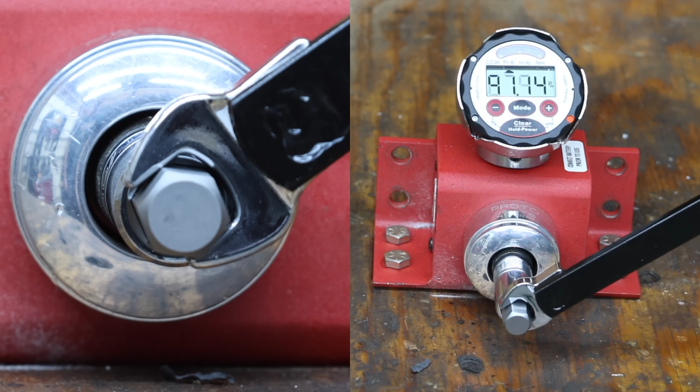So let's get the testing underway and see which brand is the best. First, we'll test the quality of the crowfoot wrenches, then we'll test the failure load of the wrenches. Most of the wrenches will not survive the final test.

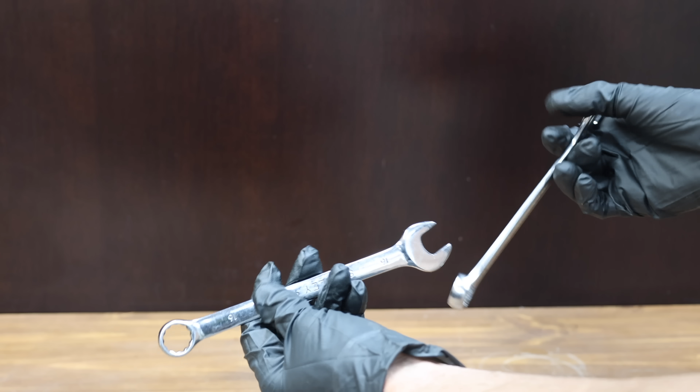A serpentine belt, also known as a drive belt, accessory belt, or fan belt, is typically held tight by an automatic tensioner. In order to remove the belt, it usually takes a decent amount of torque. Trying to double up a set of wrenches has been my go-to for years, but it's pretty easy to injure hands or fingers when the wrench slides out of position.

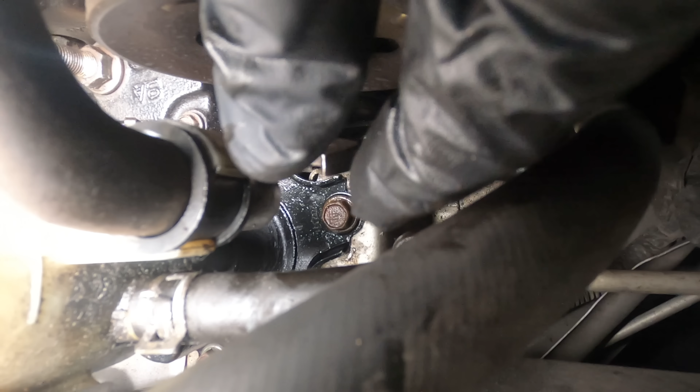Fortunately, there's a tool designed for this job that should also perform well at removing fasteners in hard-to-reach areas. At a price of only $20 is this Pittsburgh brand, sold at Harbor Freight. They claim this tool pays for itself 10 times over the first time you use it to replace your serpentine belt. It's supposed to fit idler pulleys requiring 15mm or 18mm hex or 3/8 or half-inch square drives. Includes 13, 14, and 15mm crowfoot wrench. And the Pittsburgh is made in China.

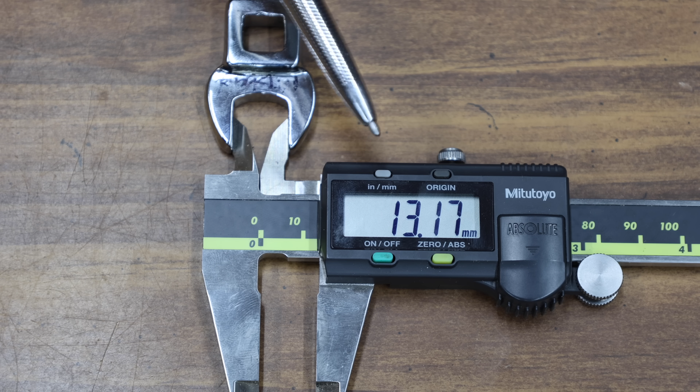Most of the crowfeet wrenches look identical, so let's weigh them to see if there's any difference in weight. The 13mm Pittsburgh weighs 31.28 grams. I measured the inner diameter of 3 crowfoot wrenches, the thickness or width, and the outer diameter. Let's use this torque wrench calibration tool to measure the maximum torque before the crowfoot rounds the soft coupling nut.

The Pittsburgh wrench rounded the nut at 27.74 foot-pounds. The wrench started off at 13.17mm, and the very soft coupling nut did stretch the jaw and cause some damage at 13.24mm. That's 0.07mm of stretch.

At a price of $28 is this AllToolsTools brand. Let's just call it the AllTools brand. It's an 8-piece universal 3/8 inch and half-inch drive set. Provides the required leverage and clearance to release the spring pressure and move the tensioner pulley. Includes 15, 16, 18mm hex or 3/8 or half-inch square drive.

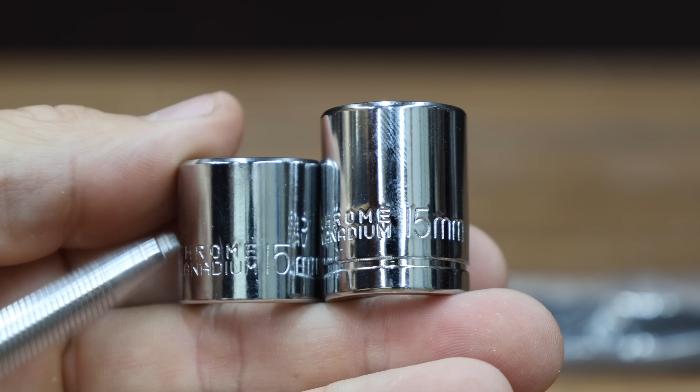The AllTools is on the left and the Pittsburgh is on the right, and the AllTools has a much lower profile for working in those tight spaces. And the AllTools is made in China.

The Pittsburgh is on the left and the AllTools is on the right, and they definitely look a little bit different. The AllTools weighs a little bit more than the Pittsburgh at 32.42 grams. The AllTools jaw opening is a little bit larger at 13.19mm, but the wrench is a little bit thicker and has a smaller outer diameter.

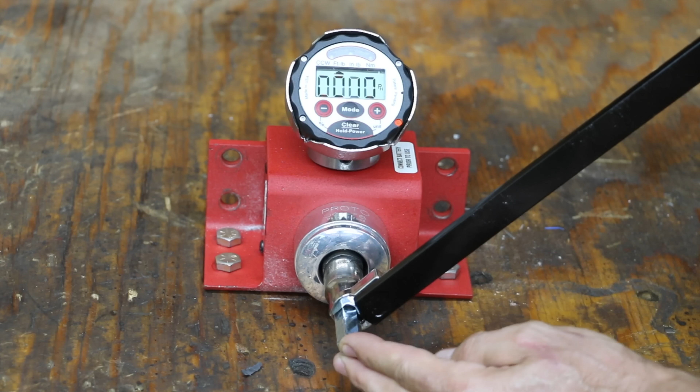The AllTools rounded the nut at 25.63 foot-pounds, or 2 foot-pounds less than the Pittsburgh. The AllTools experienced even more jaw stretch than the Pittsburgh at 0.09mm.

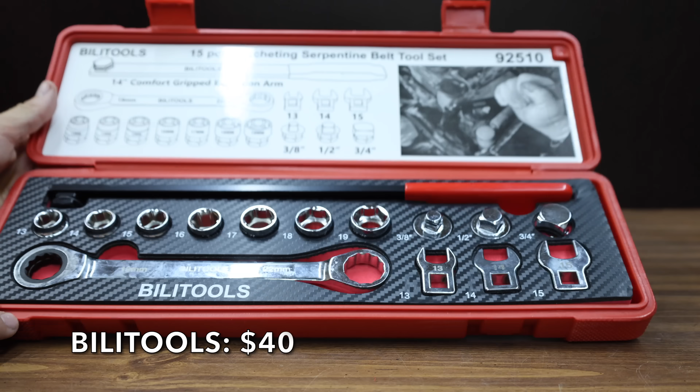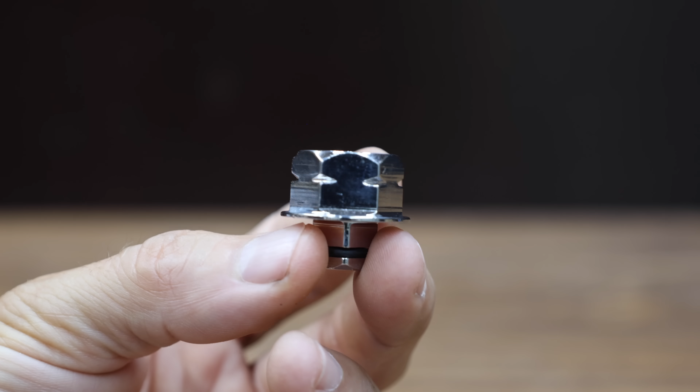At a price of $40 is this Bilitools set. Combines the advantages of a ratcheting wrench with the requirements of a serpentine belt removal tool. 7 low-profile sockets and extension to help fit into tight spots. Includes a 14-inch extension arm, ratcheting wrench with 19mm, 22mm female ratchet drive, and 3/8, half-inch, and 3/4 square adapters.

Sockets include 13 through 19mm. Crowfeet wrenches in 13, 14, and 15mm. The Bilitools is made in China, and it weighs 31.5 grams.

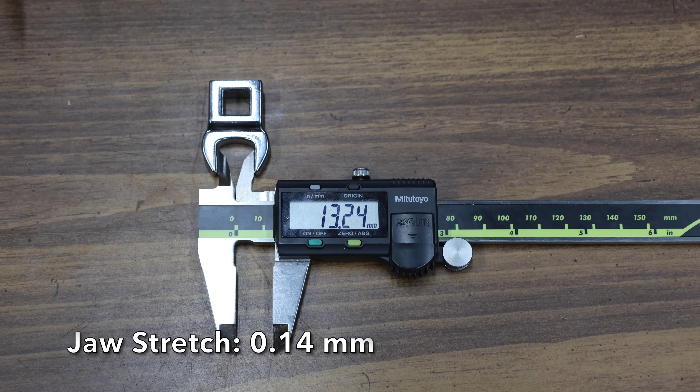The Bilitools is at 13.1mm for the tightest fit yet. The width is 6.6mm, and the outer diameter is the smallest yet at 25.15. The Bilitools just moved into third place at 26.04 foot-pounds. It experienced by far the most jaw stretch, going from 13.1 to 13.24mm.

At a price of $42 is this Powerbuilt brand. It's a 13-piece set, supposed to include everything that's needed for GM, Ford, Chrysler, Saab, VW, and Volvo. It even includes a pretty nice-looking blow-molded case. Includes 7 low-profile sockets, and the Powerbuilt is made in Taiwan.

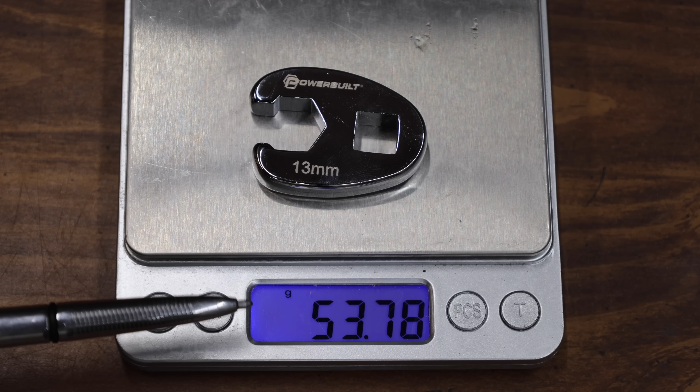The Powerbuilt is by far the heaviest yet at 53.78 grams. The name Powerbuilt seems to fit, as this crowfoot is very large and thick. It also has a huge advantage of having more points of contact like a flare nut wrench. It might not be good for tight spaces, but it's by far the best at very close to 73 foot-pounds. Very impressive. The Powerbuilt is still at 13.3mm, so no damage.

At a price of $44 is this Performance Tool brand.

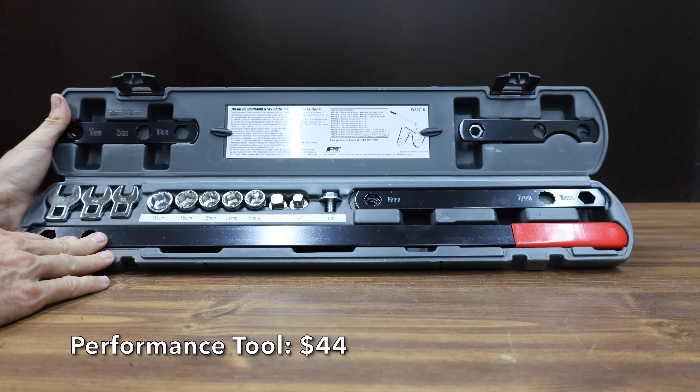And this is the most comprehensive set yet with 16 pieces. It even includes a kit designed to remove fan clutches, and has 2 different extensions for hard-to-reach areas.

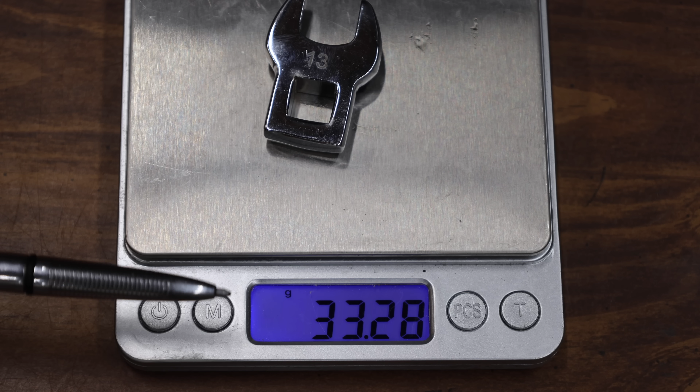The Performance Tool is made in China, weighing 33.28 grams. It's at 12.98mm, a pretty narrow wrench with an average outer diameter. It moves into second place behind the Powerbuilt at 35.49 foot-pounds, and 0.05mm of jaw stretch is also second place.

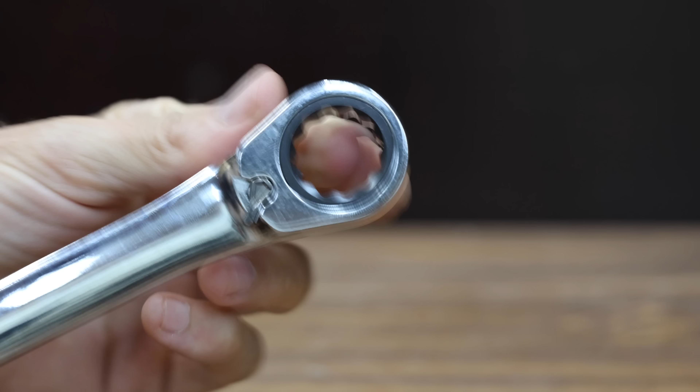At a price of $46 is this ABN brand, made in Taiwan. It's a 15-piece kit, including socket sizes 13 to 19mm, and also includes 3 crowfoot wrenches. It comes with a pretty nice looking blow molded case.

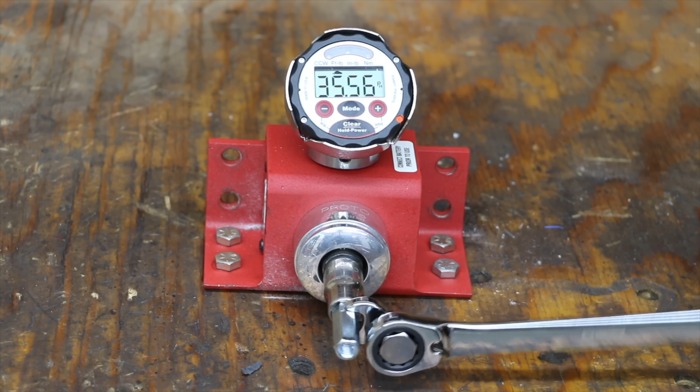The ABN is pretty heavy at 37.51 grams, starting off at 13.25mm. The wrench is a little wider than average and has a little larger outer diameter than average as well. The ABN barely edges out the Performance Tool at 35.56 foot-pounds to move into second place behind the Powerbuilt, and at 0.04mm, it did second best yet for avoiding jaw stretch.

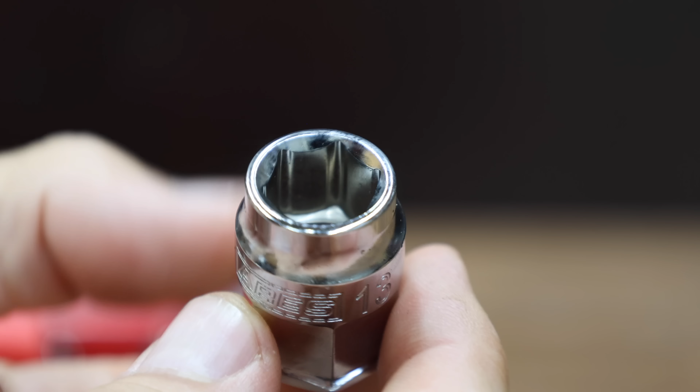At a price of $55 is this Ayers brand. It's a 15-piece set, with socket size coverage from 13 to 19mm, and crowfoot wrenches from 13 to 15 millimeters. It also includes 1/4 inch, 3/8, and 1/2 inch socket adapters, and even comes with a reversible ratcheting wrench. The Ayers brand is made in Taiwan.

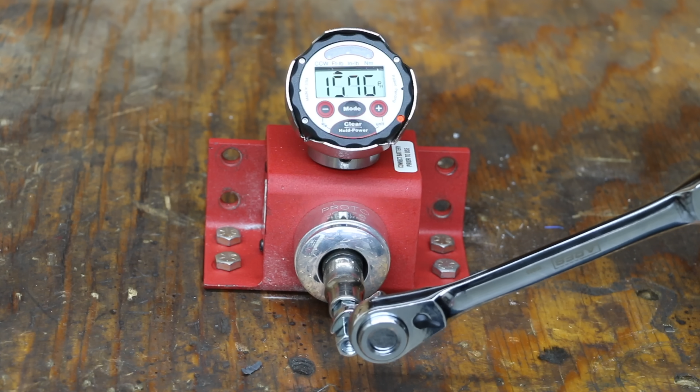The Ayers is pretty light at 30.44 grams, at 13.12 millimeters, but it's a pretty narrow wrench at only 5.9 millimeters, with 26.84 millimeters of outer diameter. The Ayers rounded the nut at 29.68 foot-pounds, and the jaw also experienced quite a bit of stretch.

Also at the price of $55 is this DNA brand. The tools come in a pretty nice looking blow molded case. It's a 16-piece set, coming with 5 sockets, 3 crow's feet, 3 bars, 2 square drives, 1 GM fan clutch kit, and 2 fixed screws.

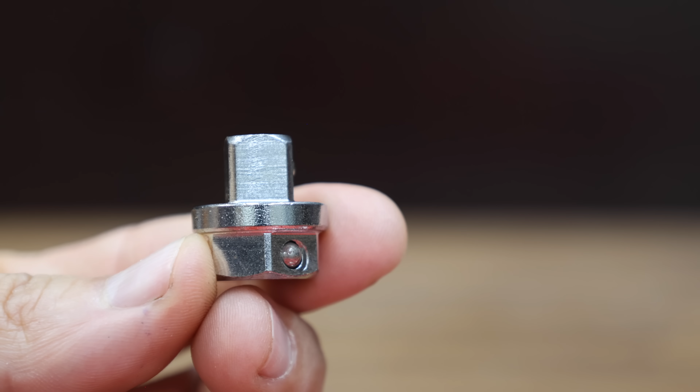The DNA motoring set is made in China, weighing 42.83 grams. It's at 12.92 millimeters and is pretty wide at 8.18 millimeters, with an outer diameter of 27.82 millimeters, so this Crowfoot wrench should perform very well. The DNA motoring moves into second place at 50.3 foot-pounds, though the jaw did experience quite a bit of damage at 0.08 millimeters of jaw stretch.

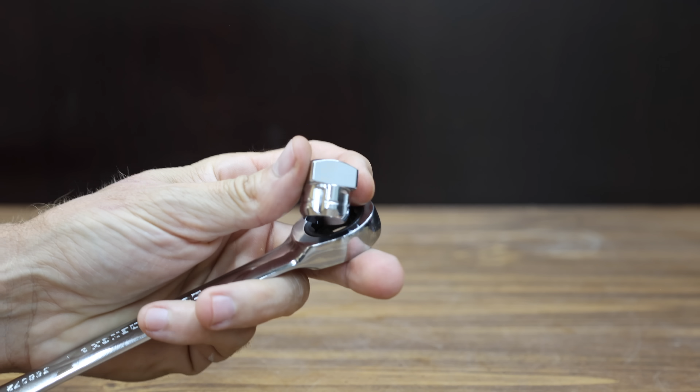It includes 3/8, 1/2 inch, and 3/4 inch adapters, with socket sizes from 13 to 19 millimeters and crow's feet from 13 to 15 millimeters. The GearWrench set is made in Taiwan, weighing 33.11 grams, at 13.15 millimeters, 6.08 millimeters of width, and 27.03 millimeters of outer diameter.

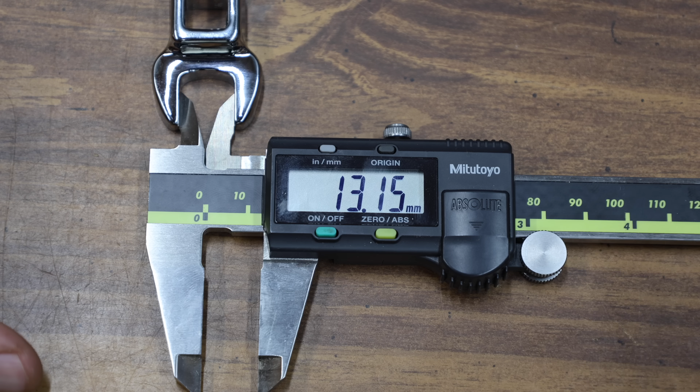The GearWrench moves into 5th place at 31.79 foot-pounds. However, it experienced minimal damage at 0.04 millimeters of jaw stretch.

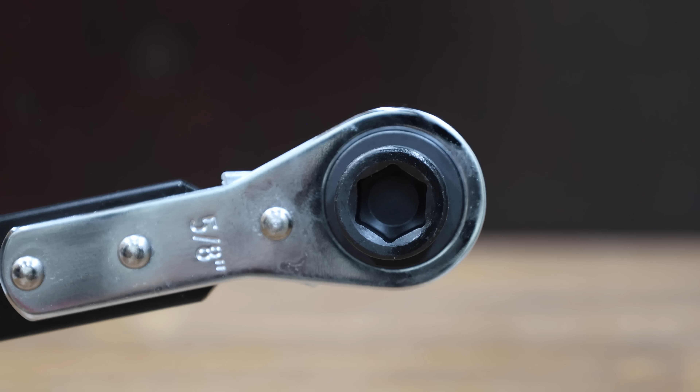At a price of $70 is this ICON set, which is sold at Harbor Freight. It has a 21-tooth reversible ratchet, includes 6 sockets and 3 Crowfoot wrenches, plus 3/8 and 1/2 inch adapters. The ICON definitely seems to have the best quality blow molded case. The 13-piece ICON set is made in Taiwan.

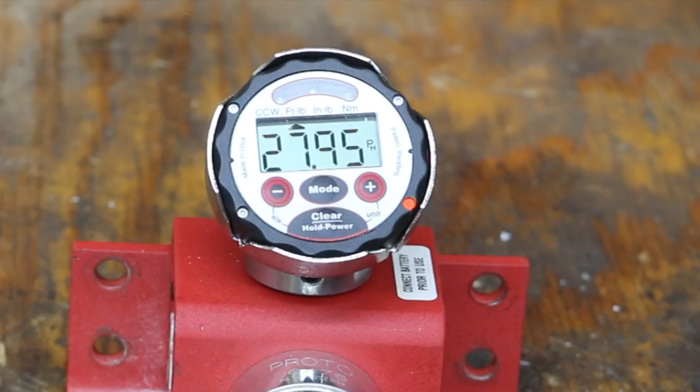It's right at 32 grams for the ICON. The Harbor Freight ICON is at 13.13 millimeters, but it's pretty narrow at only 5.93 millimeters, with an outer diameter that's pretty narrow at only 26.95. The Harbor Freight ICON just moved into 8th place behind the Pittsburgh at 27.95 foot-pounds, with the jaw only stretching by 0.04 millimeters.

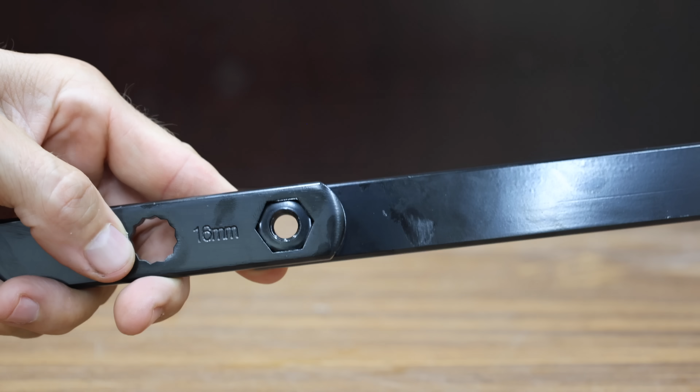Also at the price of $70, the same price as the ICON, is this OTC brand. It includes 13, 14, and 15 millimeter Crowfoot wrenches, plus a 13 and 16 millimeter 12-point wrench built into the handle, and comes with 3/8 and 1/2 inch square drives. The OTC is made in Taiwan.

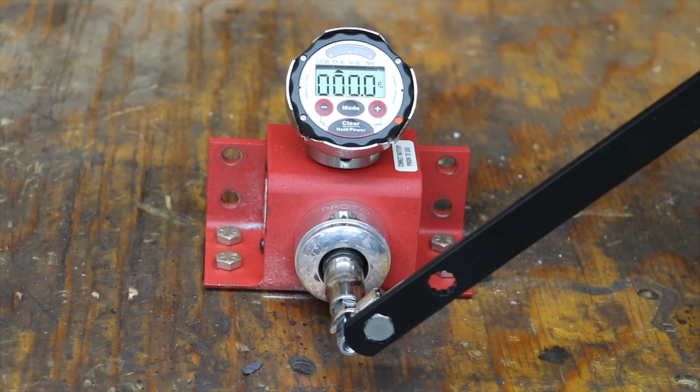The OTC weighs 31.8 grams, at 13.16 millimeters, and it's even more narrow than the ICON at 5.79, with an outer diameter of 26.99 millimeters. The OTC also struggled in this test at 27.16 foot-pounds, only experiencing 0.04 millimeters of jaw stretch.

I've had several requests to test the Matco Tools brand, and I did place an order.

There was no indication that the tool set was not in supply when I made the order, but when I placed the order, it was immediately placed on back order. Unfortunately, this has happened to me more than once, so I canceled the order after several weeks of waiting.

So the Powerbuilt came out on top at 73.01 foot-pounds. DNA Motoring finished in 2nd place at 50.3, and ABN 3rd at 35.56 foot-pounds.

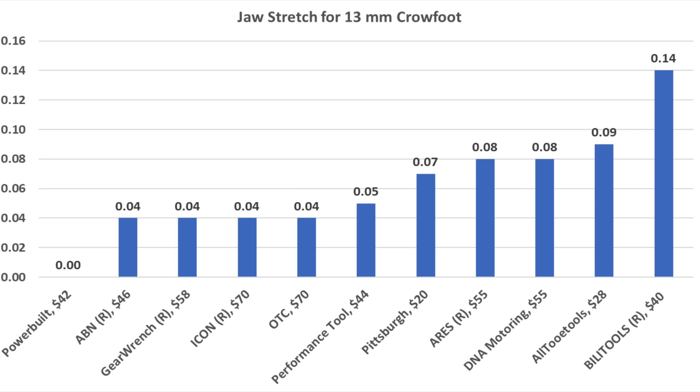The coupling nut is very soft and should not cause significant jaw stretch. Fortunately, the Powerbuilt did not experience any jaw stretch. ABN, GearWrench, ICON, and OTC finished in 2nd place at 0.04 millimeters of jaw stretch.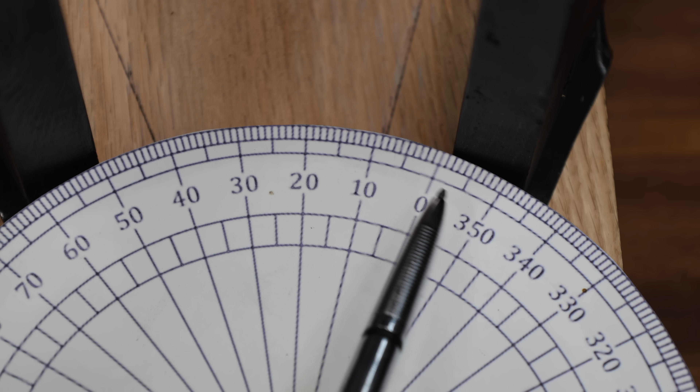If you're working within a tight space, you'll want a ratchet that makes a lot of progress with each back and forth swing. I'll be using a tester that has a 50-degree space, and we'll see how many right to left swings it takes for one complete rotation. Let's skip the Pittsburgh and the AllTooetools since they don't include a ratcheting wrench.

The tooth count on the Bilitools ratchet is 72, and the Bilitools is off to a pretty good start at 11.7 right to left passes. The ABN has around 128 tooth count ratcheting mechanism, and the ABN performed even better than the Bilitools at 11.2 right to left swings for one complete rotation.

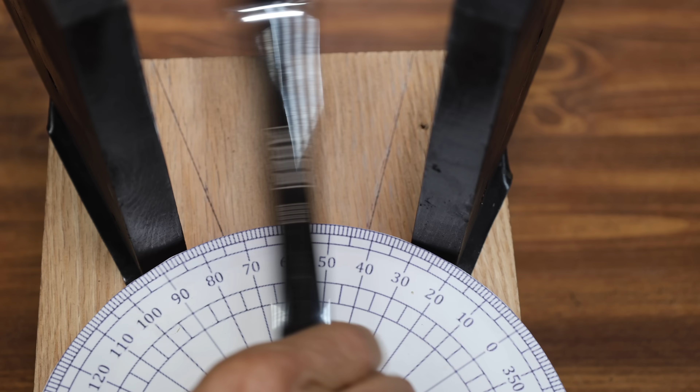The gear set on the 72 tooth ARES ratchet is definitely not as efficient as the ABN at 14.5 back and forth passes. The GearWrench ratcheting wrench also has 72 teeth, and it performed the same as the ARES at 14.5 back and forth passes.

The Harbor Freight ICON only has 21 teeth, and the low tooth count is really hurting the ICON with just one click during the backswing. With only one gear tooth advancing per swing, the ICON finally finished at 21.5.

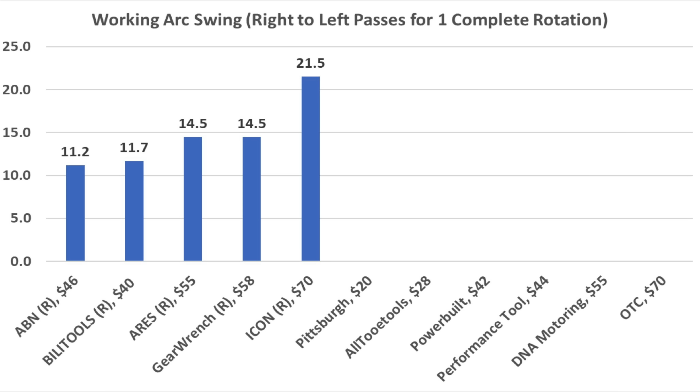So the ABN came out on top at 11.2 right to left passes. Bilitools finished in 2nd at 11.7, and ARES and GearWrench tied for 3rd at 14.5.

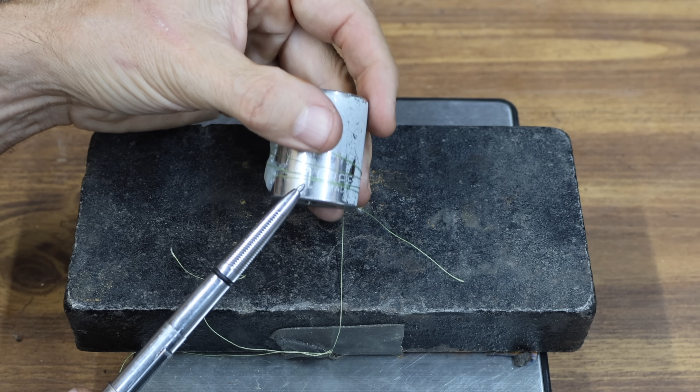Using a ratchet with a lot of backdrag in tight spaces can really make it challenging at times. If there's enough space, adding resistance to the socket using finger pressure allows the socket to advance, but sometimes that's not an option. I've got a fishing string attached to this 1-inch socket that's attached to a scale. I'll lift the ratcheting wrench until the gear set advances.

The Bilitools has quite a bit of backdrag at 616 grams. The ABN came out on top for working arc swing, and it's going to be very difficult to beat at only 204 grams of back drag.

Just like the Bilitools, the ARES has 72 teeth, and it also has quite a bit of back drag at 534 grams, moving into second place. The GearWrench just moved into second place behind the ABN at 396 grams of back drag.

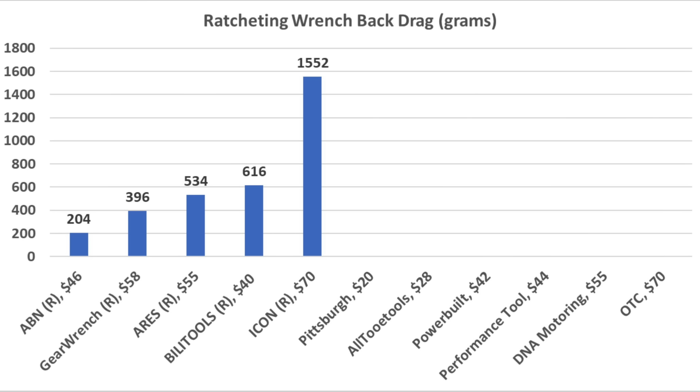The 21 tooth ICON seems pretty stiff, and 1,552 grams of back drag is more than twice as much as any of the other brands. So the ABN finished in first place at 204 grams of back drag. GearWrench finished in second place at 396 grams, and ARES at 534 grams of back drag.

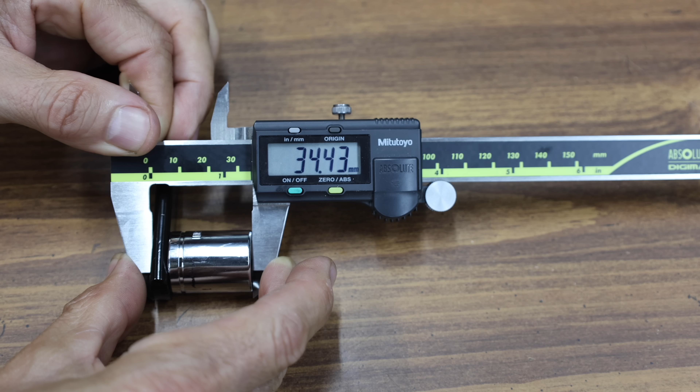If you're trying to access the tensioner pulley on a modern front-wheel drive import, wrench or socket clearance might be a challenge. The Pittsburgh does not come with low-profile sockets, and the wrench plus socket measure right at 34.43 millimeters. The AllTooetools offers a much lower profile at 27.48 millimeters, or about 7 millimeters difference.

The Bilitools with the ratcheting wrench moves into the lead at just under 26 millimeters. The Powerbuilt moves into second place behind the Bilitools at 26.9 millimeters. The Performance tool is going to be very difficult to beat at only 21.03 millimeters.

It's 30.28 millimeters for ABN's ratchet and socket. The ARES requires quite a bit of space at 32.28 millimeters. DNA Motoring moves into second place behind the Performance tool at 22.05.

The ratchet and socket for the GearWrench are at 26.09 millimeters. The ICON ratchet and socket have an even better profile at 25.36. At 20.42 millimeters, the OTC Tools moves into the lead.

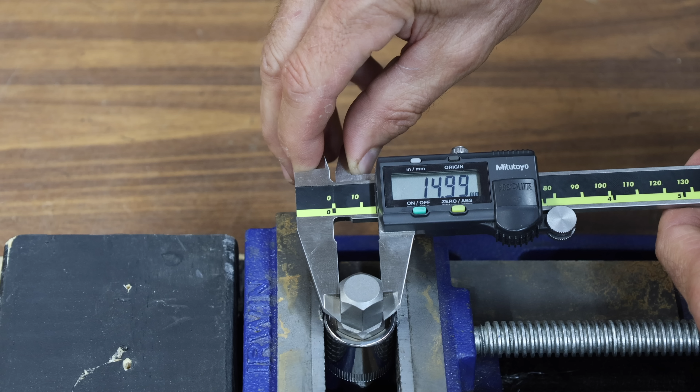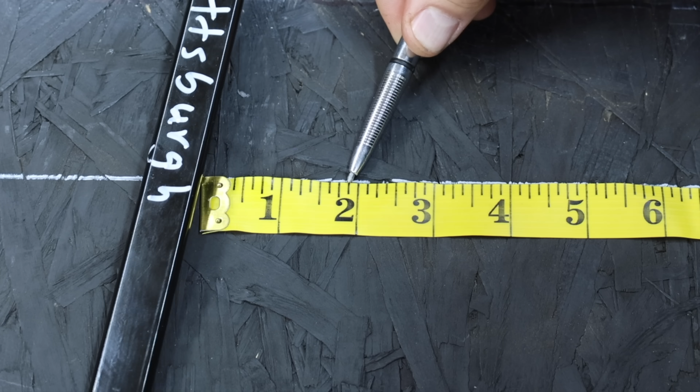Let's see which brand offers the tightest engagement with minimal slop using this 15 millimeter Allen socket. In tight spaces, minimal slop ensures the wrench has enough swing to release the tension from the belt tensioner. At 1 foot from the fulcrum, the Pittsburgh performed well at 1 7/8 inches of slop. I repeated this test for each of the wrenches, and the ABN ratcheting wrench did the best at 1 5/8.

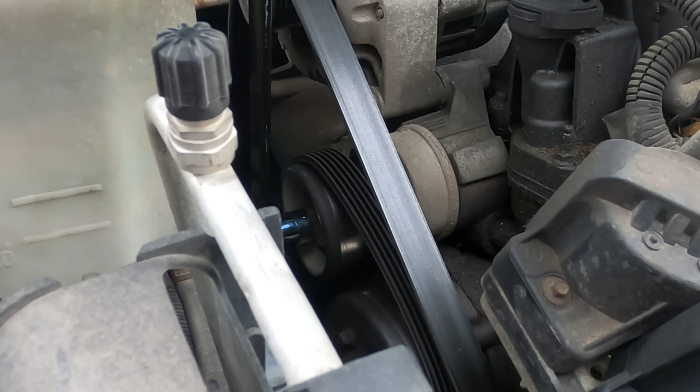The DNA Motoring non-ratcheting finished in second at 1 3/4. I tested out all the tools on a couple of Chevrolets and a Buick, and they all worked very well.

On the other hand, this is a fairly new Toyota 4Runner, and accessing the belt tensioner is a bit of a challenge. I rotated the socket several times to align it with the bolt. Even with the engine cover out of the way, the Pittsburgh just doesn't have enough range of motion to release the belt. The AllTools performs the same as the Pittsburgh; insufficient swing space prevents the wrench from releasing the pulley tension.

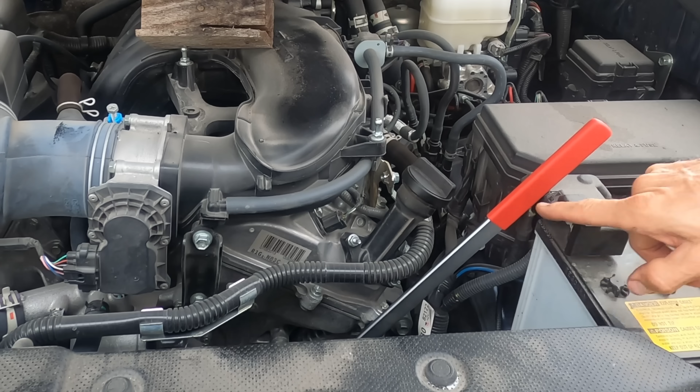The Bilitools ratcheting wrench has a 2-piece handle that adjusts to provide plenty of access swing to release the belt tension. Just like with the Pittsburgh and AllTools, there's not enough swing space for the Powerbuilt. The Performance Tools adjustable 2-piece handle can be adjusted to offer ample access and swing to release the belt tension.

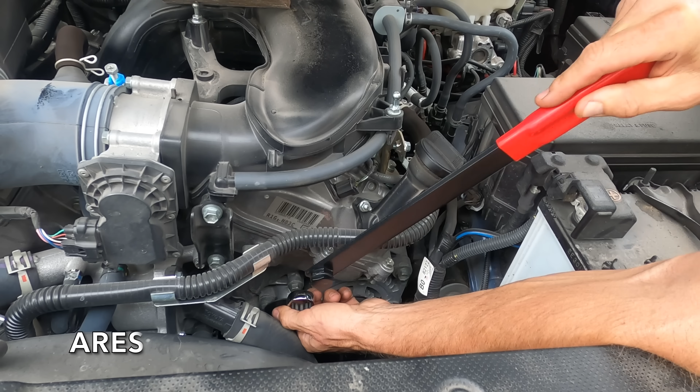Just like the Bilitools, the ABN ratcheting wrench has a 2-piece handle that adjusts to provide plenty of access swing to release the belt tension. The ARES also has a ratcheting wrench, but isn't as efficient as the ABN for maximizing wrench positioning and swing.

The 2-piece DNA Motoring isn't as efficient as a ratcheting wrench, but it'll get the job done if you can get it to hold on to the socket. The GearWrench's 2-piece ratchet isn't quite as precise as the ABN, but it'll definitely release the belt tension.

Without the second handle piece, the ICON doesn't have enough swing space. With the extra handle attachment, the ICON will work, but the 21-gear ratcheting mechanism makes this more of a challenge than the Bilitools, ABN, ARES, and GearWrench. The OTC's 2-piece handle can be adjusted to provide plenty of swing space to release the belt tension.

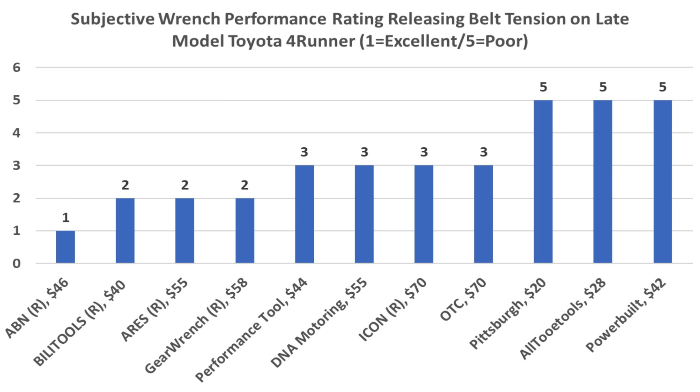Rating performance is highly subjective. ABN achieved the best possible rating of 1 since its efficient ratchet allows the wrench to achieve maximum swing. Bilitools, ARES, and GearWrench all tied for second place with a rating of 2.

Let's compare the strength and durability of the 14mm Crowfoot next. We'll use this 14mm Allen socket, which measures right at 13.98 millimeters.

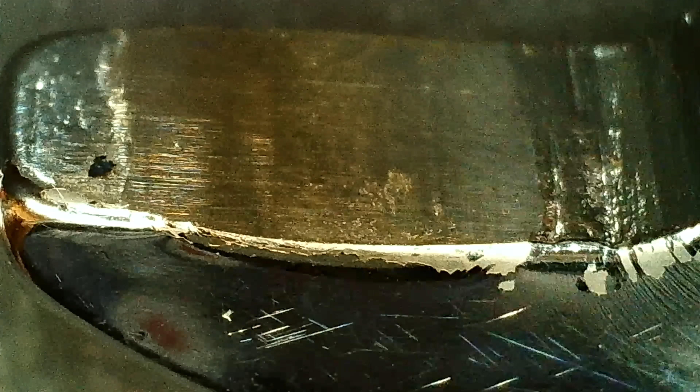The 14mm Pittsburgh just isn't a very strong wrench, letting go at only 90.48 foot-pounds. The Pittsburgh is a pretty soft wrench and experienced quite a bit of damage. The 14mm wrench has expanded to almost 15 millimeters.

Things were going great for the AllTools until things suddenly went from happy to snappy at 105.1 foot-pounds. Thank goodness I was wearing eye protection.

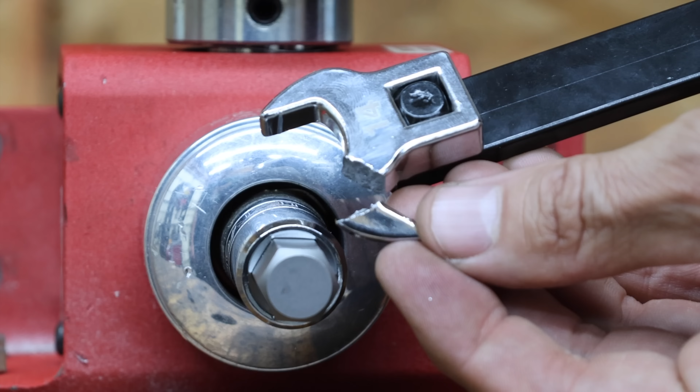The Bilitools performed 10 foot-pounds better than the Pittsburgh at just over 100. There's a lot of damage to the wrench, and it grew by almost a full millimeter.

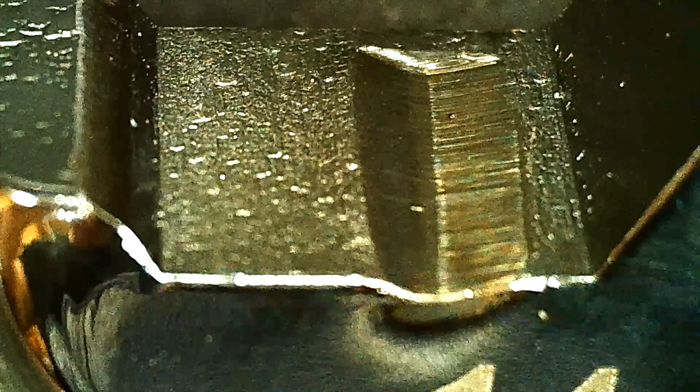The name seems to fit as the Powerbuilt once again refused to give up, and 162.4 foot-pounds moves the Powerbuilt into the lead. Unfortunately, the wrench handle did not survive the test. The wrench did experience some damage and about 0.22 millimeters of jaw stretch.

The Performance Tool made it to just over 104 foot-pounds when the lower jaw finally broke. I never found the lower jaw, but the upper jaw did experience quite a bit of damage.

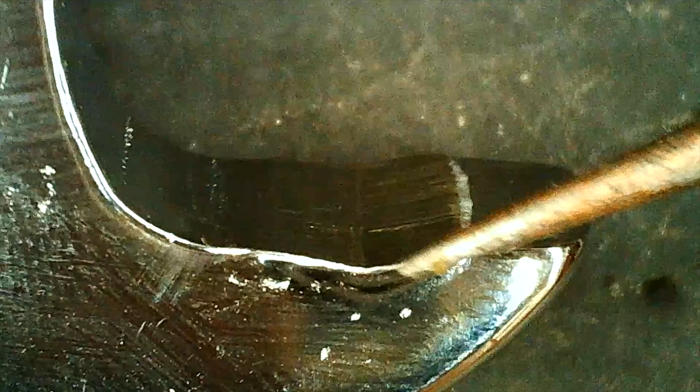The ABN once again performed very well at 123.4 foot-pounds to move into second place behind the Powerbuilt. As you might expect, the Crowfoot wrench did experience a lot of damage and grew by 0.63 millimeters.

The ARES has trailed the ABN throughout the showdown and is trailing it once again at 98.34 foot-pounds. The ARES is made of a much softer metal than the ABN, and it also experienced quite a bit of jaw stretch at 0.86 millimeters.

The DNA Motoring was too small to fit onto the Allen socket without using quite a bit of force. The super tight fit really helped the DNA Motoring, finally letting go at 148.1 foot-pounds. The wrench is chewed up pretty badly and the 3/8 inch drive is twisted. The jaws grew by 0.85 millimeters.

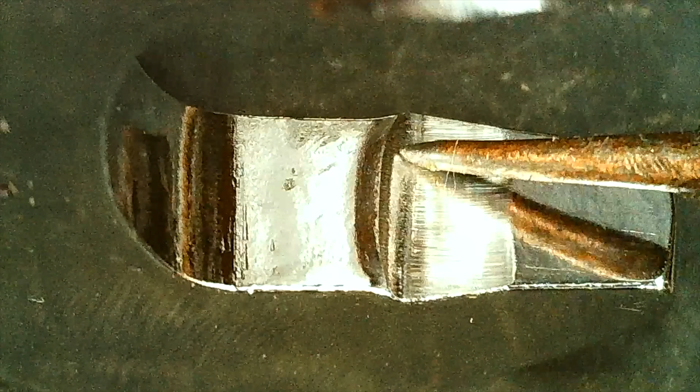The GearWrench really failed to impress, letting go at only 94.93 foot-pounds, barely beating the Harbor Freight Pittsburgh. The GearWrench did experience a lot of damage and it did grow by 0.71 millimeters.

The Harbor Freight ICON also failed to impress, letting go at only 97.29 foot-pounds. There's a lot of damage to the wrench and it grew by 0.8 millimeters. The OTC experienced an early TKO at only 87.99 foot-pounds to end up in last place.

Lots of damage to the wrench and the jaw grew by 0.7 millimeters. So the Powerbuilt finished in first at 162.4 foot-pounds.

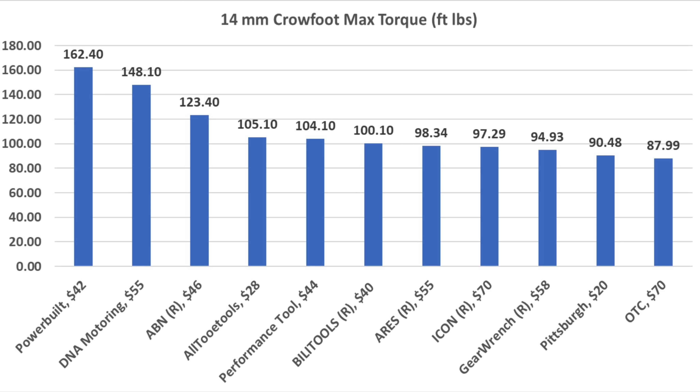I should have disqualified the DNA Motoring wrench since it was too small and had to be pounded onto the Allen socket with a hammer. And the ABN finished in third place at 123.4 foot-pounds.

Let's test the failure load of the 3/8 inch drive next. I'll use a 15mm socket with the Pittsburgh, and the Pittsburgh seems to be a very light-duty tool. The 3/8 inch drive broke free from the wrench at 186.8 foot-pounds.

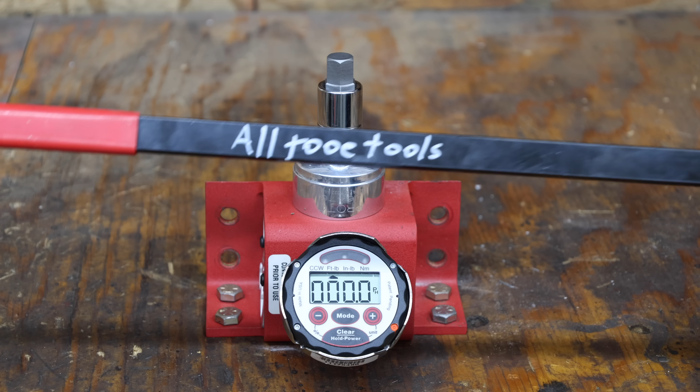Testing the AllTools. Just like the Pittsburgh, the AllTools seems to be a really light-duty tool. And the AllTools failed in the same way as the Pittsburgh, but only at 156.4 foot-pounds.

The Bilitools definitely seems to be more durable than the Pittsburgh and the AllTools. The Bilitools 3/8 inch drive broke at 201 foot-pounds, which is not too bad for a budget tool set. We already broke the Powerbuilt wrench earlier in the showdown at 162.4 foot-pounds.

I just haven't had much success with the Performance Tool brand in past reviews. However, the Performance Tool outperformed a few brands in this showdown at 209.1 foot-pounds on this test.

And the ABN definitely seems to be the best tool set in the review so far. The 3/8 inch drive broke at 206.9 foot-pounds, but the ratchet is still working properly.

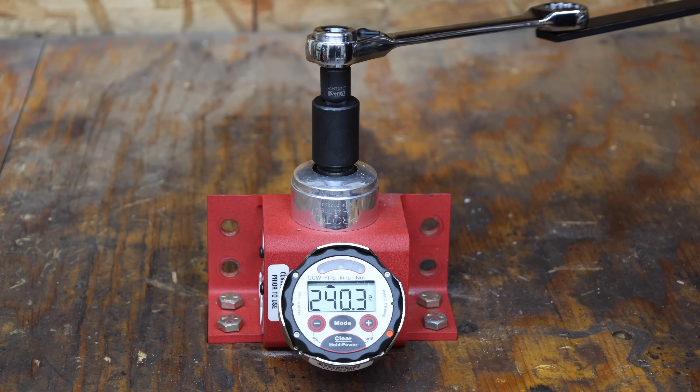And the ARES 3/8 inch drive survived the test, but the ratchet broke at 240.3 foot-pounds. That's actually a pretty good performance for a budget ratcheting wrench and very good performance for a 3/8 inch drive.

And the DNA Motoring could use a little DNA upgrade as the tool failed at only 141.8 foot-pounds to move into last place. Definitely a light-duty tool.

And the GearWrench ratcheting wrench might be a little clunky and unrefined, but the 3/8 inch drive and ratchet survived 280 foot-pounds of torque, which is pretty impressive.

And the ICON ratchet appears to have jumped off the 3/8 inch drive and nearly took out the torque wrench tester display. I'll try this again. And the second attempt is even worse at 128.9 foot-pounds.

And the OTC is just as expensive as the ICON, and it just finished behind the $20 Pittsburgh at only 174.9 foot-pounds. Another light-duty tool.

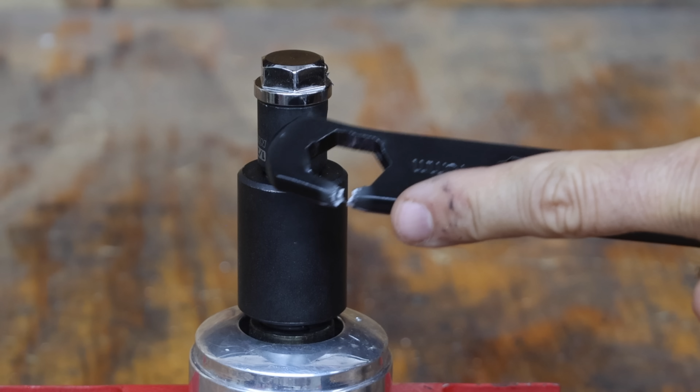And the only survivor in this test is the GearWrench at over 280 foot-pounds. A couple of the other brands have 3/8 inch drives that survive, but the wrenches failed. Let's remove the 3/8 inch drives and install the 15mm sockets to see if we can break the sockets or wrenches.

And the Bilitools ratchet and socket survived the torture test at over 280 foot-pounds. And a Performance Tool wrench ran out of performance at 219.7 foot-pounds. And this wrench is definitely ruined.

And the ABN wrench and 15mm socket survived the test at 276.4 foot-pounds. Skipping the ARES since I already broke the ratchet at 240.3 foot-pounds.

And the DNA Motoring definitely needs better DNA at only 165.7 foot-pounds. The super soft socket and wrench destroyed each other.

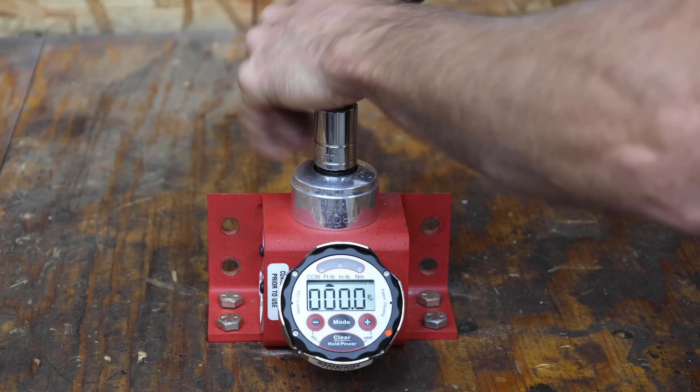And the GearWrench ratcheting wrench and socket once again survived the test at over 277 foot-pounds.

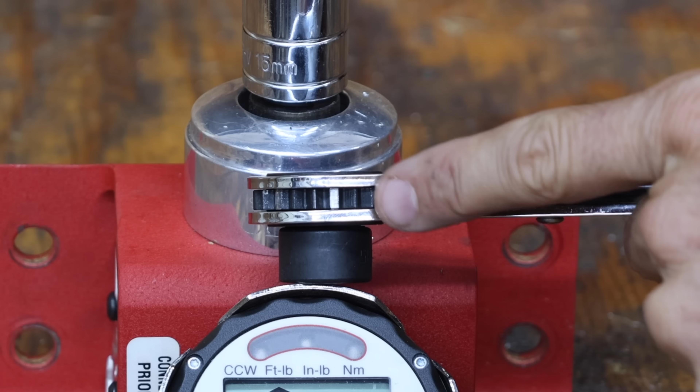And the ICON is bygone at 55.89 foot-pounds. The ratchet must have experienced catastrophic damage in the previous test. There's definitely some visible damage to the gear set. And the OTC broke in the previous test at 174.9 foot-pounds.

If you're looking for a highly durable wrench, the Bilitools, ABN, and GearWrench survived the torture test at well over 250 foot-pounds. So which tool set is the best?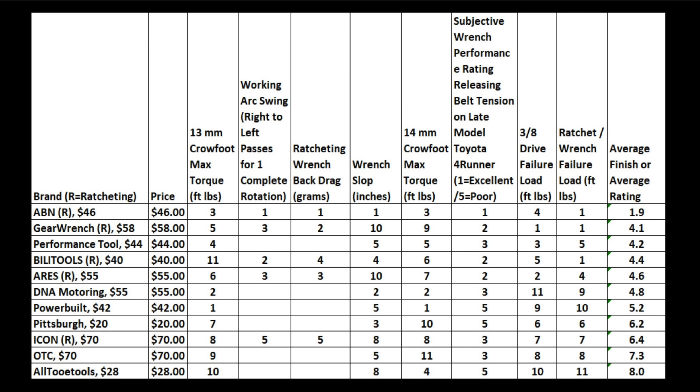The tool sets are organized based upon the average finish or rating. And the ABN ran circles around the competition in most categories with the best average finish at 1.9. Considering the price of under $50, that would definitely be my choice.

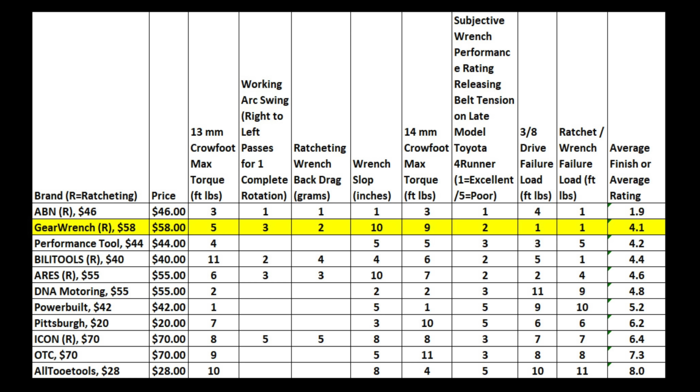GearWrench finished in second place with an average finish at 4.1. The ratcheting wrench really holds back the tool set compared to the ABN. However, I would buy either of those tool sets if the price was right.